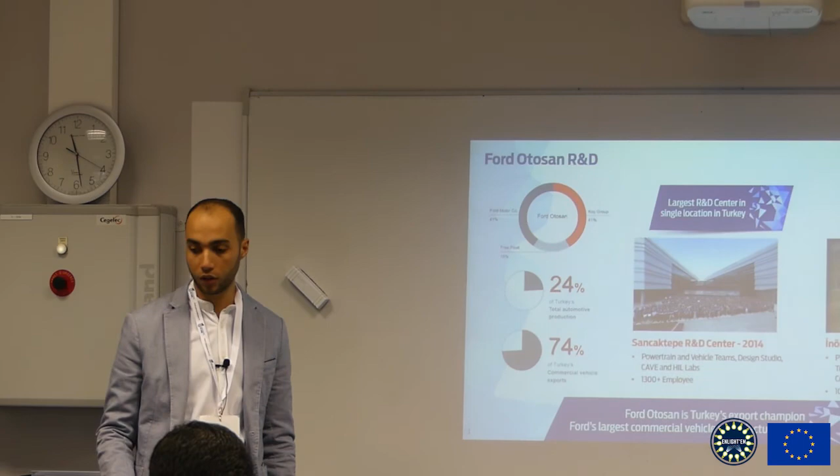So first, who we are. We are Ford Otosan, and we are a joint venture between Ford Motor Company US and Koç Holding Group in Turkey. So we are like a shared company between both of them. We are automotive manufacturers, and our employees are around 10K, so it's an extremely huge company, and we are distributed across 3 factories only in Turkey, and 3 factories is extremely huge.

And we have the biggest R&D center in Turkey, which has 1.5K engineers working there for R&D and product development. Some brief about our products. Those are products which we have the IP of. Even Ford-Otosan, like Ford Motor Company, has other IPs.

And we have trucks, we have carriers, we have transit vehicles. Those are light commercial trucks. And that truck on the left here won the Truck of the Year in Europe last year. And we have like 7K units per year for those huge trucks and almost 380K units for light commercial trucks.

So let's get started. Why do we care about V2X here? Of course, V2X is to ensure road safety and environmental aspects like pollution and reducing fuel consumption, especially in platooning itself. But to do that, we have to make connectivity between vehicle and vehicle, and this is our major concern, and also vehicle to infrastructure in order to organize the flow of the traffic. So distributing these signals between vehicles can be done through various connectivity, but again, why are we looking to visible light communication to be utilized in vehicular connectivity?

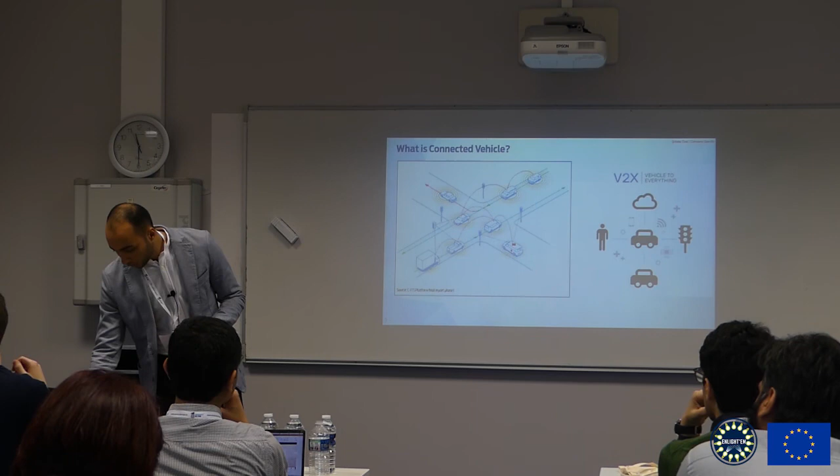So now we don't have just connected vehicles. We have cooperative connected vehicles. In that case, we are controlling each vehicle through each other, not just spreading some signals between vehicles like CAM messages or DENM messages, like cooperative awareness messages or decentralized environmental notification messages.

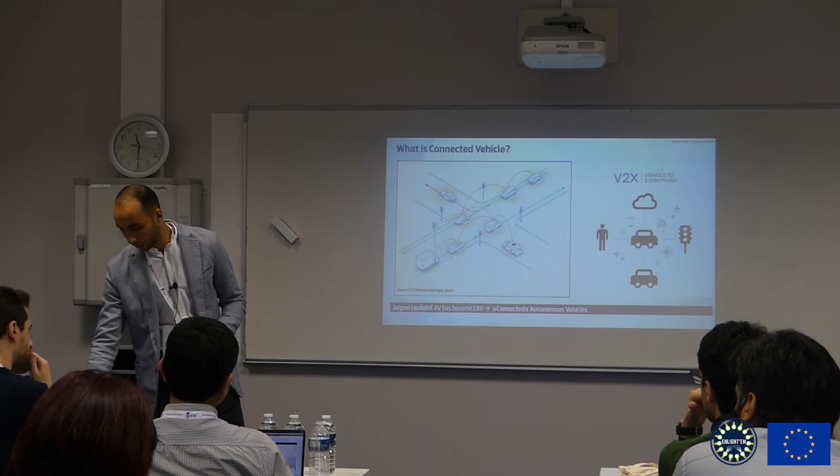And here are the key points of V2X, which most of you are aware of, like reducing energy, and caring about time management in order to make smooth traffic flow. And again, here are the ways of making connectivity through V2X, whether it's cellular or direct connectivity between vehicle and vehicle. And as a redundancy technique, we have visible light communication to conduct that. So, who we are.

Here, we have lots of projects going on in vehicle connectivity. Let's start with the first one, making highway autonomous vehicles while trucks or vehicles are moving, and even while crossing borders between countries, like smooth handover between operators in order to ensure connectivity at that time, and any drop of a message is going to make a big disaster. So ensuring that connectivity at handover between companies cross-border is one of the major tasks here.

Another task is like autonomous trucks or parking or, let's say, terminal use, which means the vehicle is on its own, making its own decisions according to the surrounding environment. So here you have to scan the environment, make a bit mapping of the surroundings and connect to the vehicle, and the vehicle is going to make its decision.

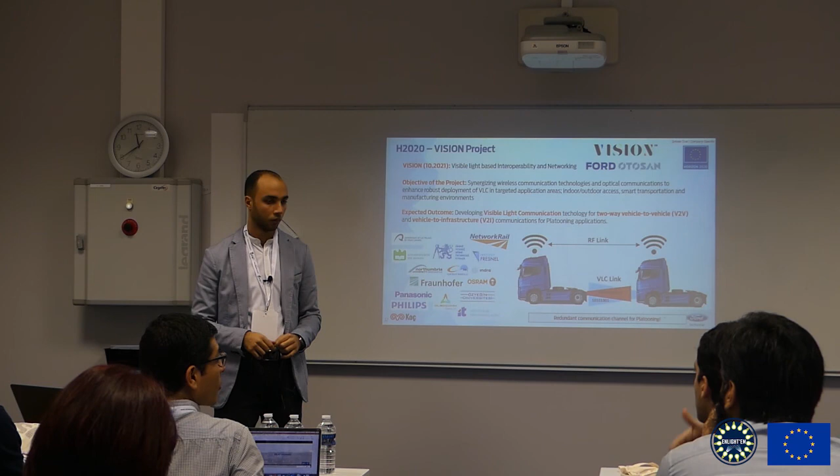Once I saw a talk showing the possibility of sending information from a camera on top of the first platoon back to the cars behind, so you have a picture or video of what's going on. Perhaps you can leave the platoon without waiting for some action to happen. I don't know, but you can see exactly what's going on.

So I'm expecting that you may use this link not only for entertainment or communication between drivers, but also to provide image and video processing from this camera.

Exactly. So we are transmitting video from the first truck, just to have real-time video of what's going on in front of the leader one.

So not even for entertainment. Entertainment is another use case, because visible light communication has extremely high bandwidth. So now we have bandwidth available for extra applications.

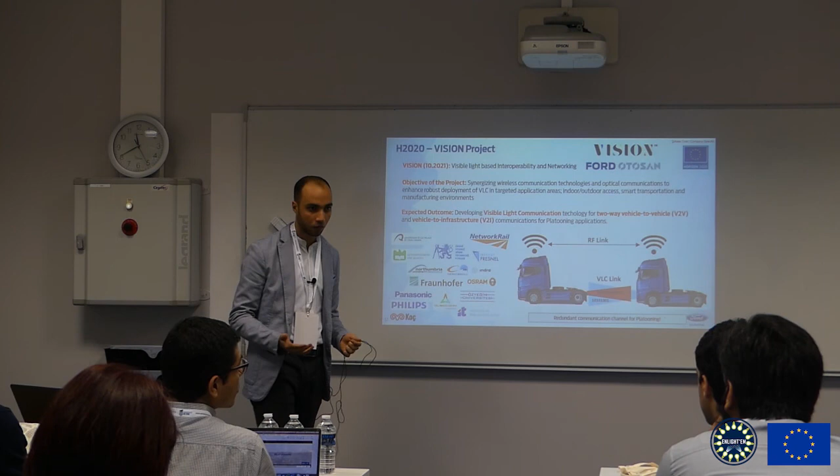As a practical case, we've implemented one-way visible light communication as a hybrid connectivity. Trucks communicate with each other using a normal RF link, and we've employed visible light communication between the follower truck and the leader truck just for platooning messages.

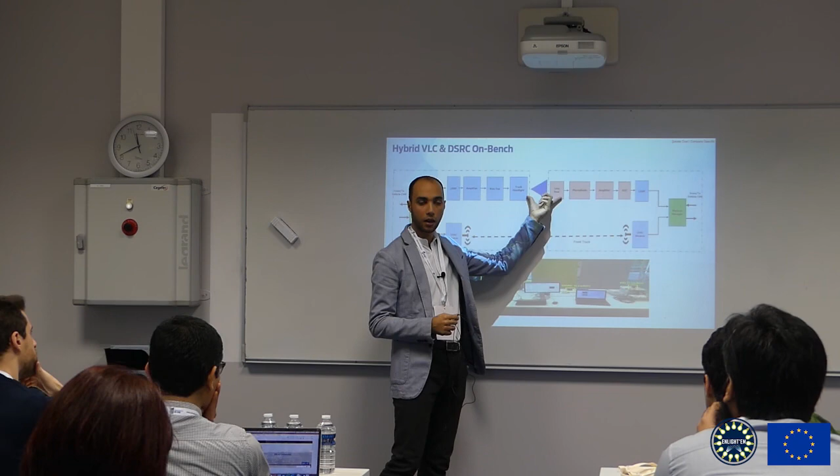Now we are going to have another link here, and in that case we're going to have full visible light communication RF hybrid platooning.

Platooning is an easy case because two cars are following each other, but what if those cars maneuver or something? In that case, you have to install your photodetector, the most critical part, in the optimal position. So according to each use case, you should identify how many photodetectors you need and the exact position to get an optimal communication link in most of those use cases.

So here we are running simulations, and practical implementation for those simulations, in order to have a robust link while vehicles are maneuvering.

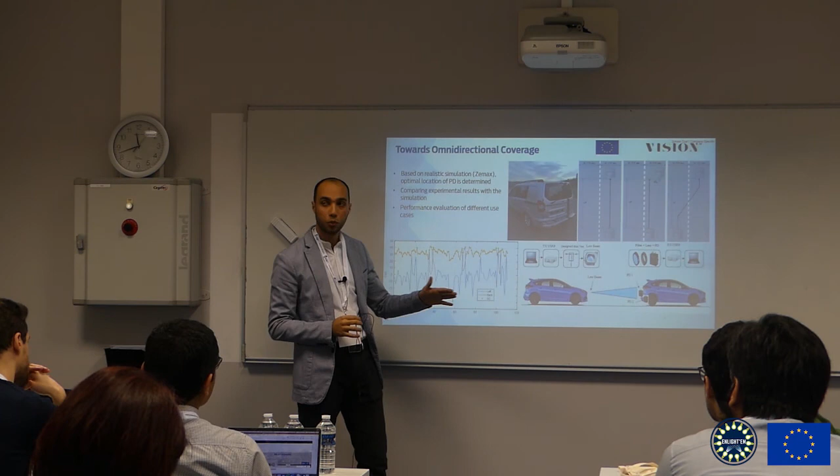In some maneuvering cases supported by platooning, like changing lanes or a curved road, 2 detectors at the back are fine, and those can be switched using selective combining technique between both of them.

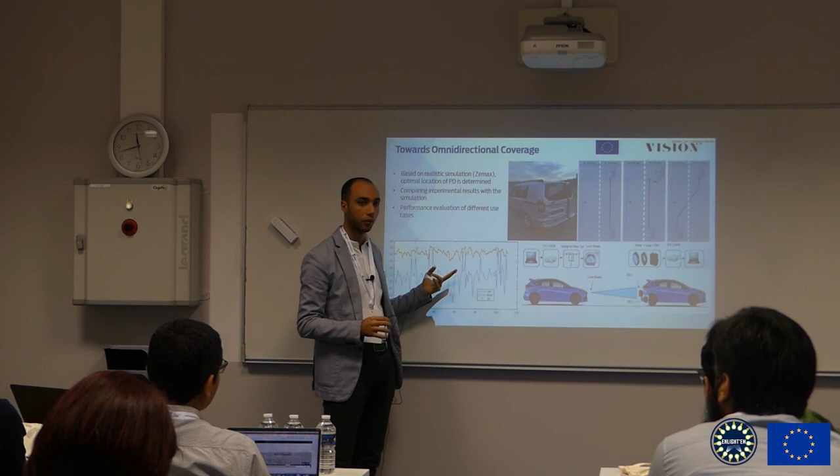At a turn, if we have a photodetector at the back, the back one is going to be blocked, but the one at the edge is going to work. So once the signal is interrupted, the other photodetector survives. Making selective combining is the easiest way between both of them.

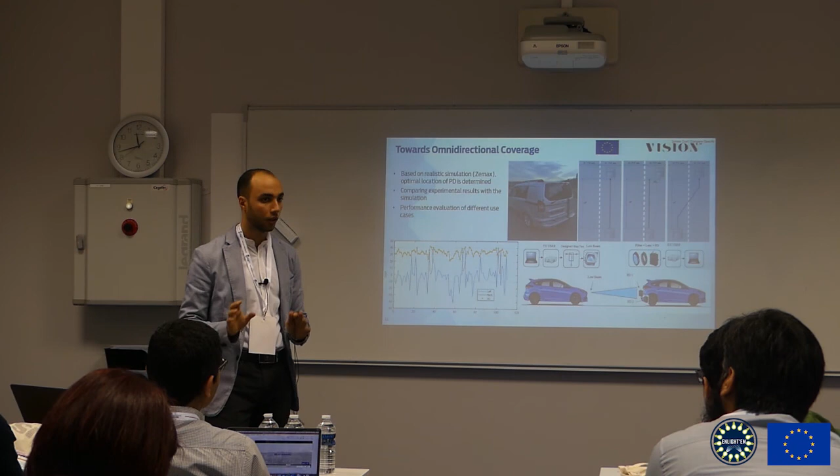Again, in order to have omnidirectional coverage, how many photodetectors and what positions are needed is still unknown for us, but we're working on it. Still a mystery.

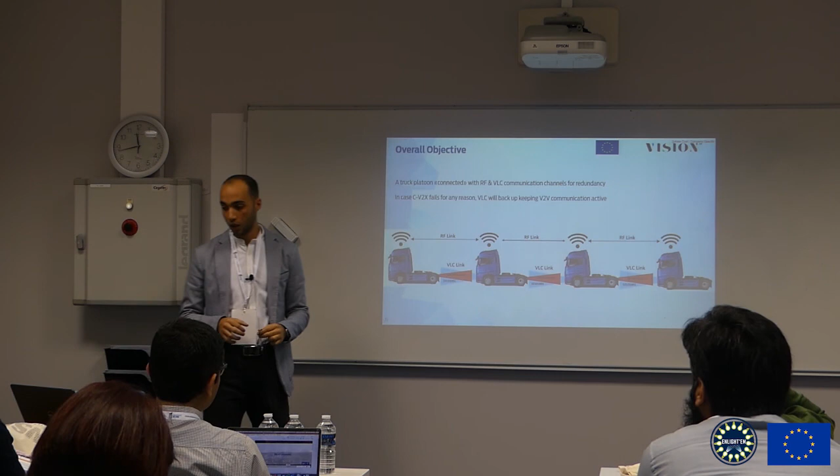Finally, after we identify all those, we're going to have a redundancy technique between our visible light communication and our radio frequency link in order to ensure system reliability.

Finally, we are going to work also on the hardware implementation through the ENLIGHT'EN project. 2 ESRs are going to come to our company also in the scope of the ENLIGHT'EN project in order to work on the back-end development of the hardware connectivity.

So some of your colleagues are going to support us in that situation. Of course, all of you.